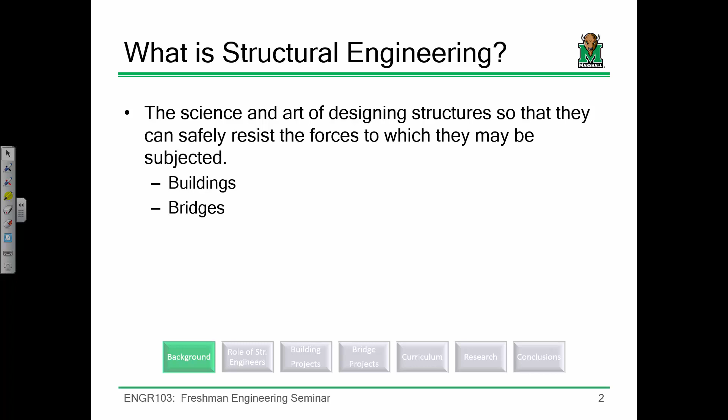We do our best to simplify things by looking at it from two sides of the equation. So the first thing we do when attacking any type of structural analysis problem is we start looking at the loads that our structure is going to be subjected to.

Let's say we were designing some of the floor beams in the room you're sitting in right now. First, we'd have to quantify the loads those beams would be subjected to. The beams have to resist their own self-weight and the weight of all the floor components, and they have to be strong enough to resist the weight of all of you.

If we look at entire building systems, we have to consider environmental loads, making sure buildings can withstand things like wind and snow. Another big topic in structural engineering that doesn't really affect us here in West Virginia, but can affect places like California or Japan, is earthquakes. Buildings have to be strong enough to resist that.

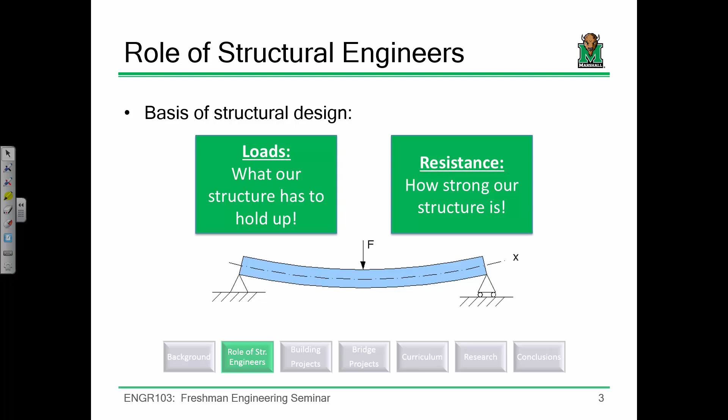So that's the first side of the equation: calculating all the forces structures will be subjected to. The second half is resistance. In college, getting your bachelor's or master's degree, you'll learn how steel, concrete, and timber behave. Once you determine how those materials and members behave, you ask yourself: how large do those members need to be so their strength is bigger than the loads? That's basically all there is to structural engineering, but it presents an interesting dilemma.

Say you're a bridge engineer designing a bridge in your hometown, and you know your grandma and grandpa will use that bridge every day to go into town or to the grocery store. You think, I don't want anything to happen to grandma, so I'm going to design it very stout, using very large, deep beams to make a very strong structure.

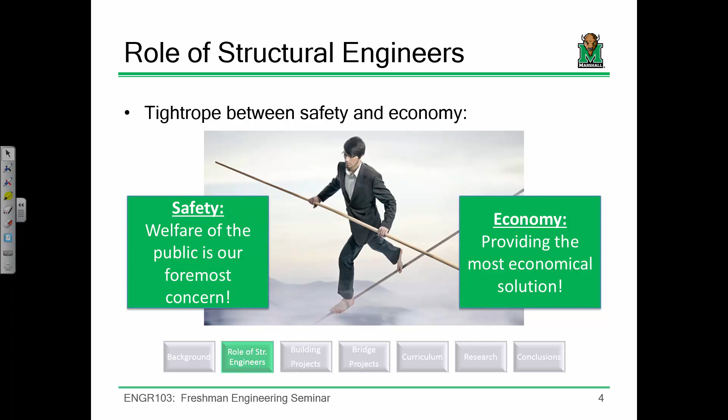That creates a problem, because while you've designed a structure that's safe and sound, you've also made one that's very expensive. This is true of structural engineers, and really most engineering disciplines in general: we walk a tightrope between safety and economy. We always have to design a structure that meets the safety and welfare of the public first, but once we meet that, we have to design something economical. That's where the challenge of structural engineering comes into play.

We don't just work on tall buildings—we also work on things like stadiums, such as the new Dallas Cowboys Stadium. Looking at projects like this, you might wonder how you even begin to approach something so massively complex. But our general strategy is this: even though a structure has thousands of different members and components, it's still just comprised of beams, columns, braces, and things like that. If you can design a beam or a column, you can design any beam or column in a structure like that.

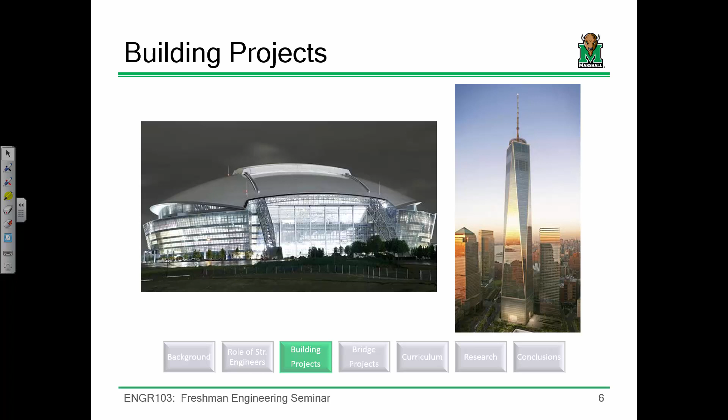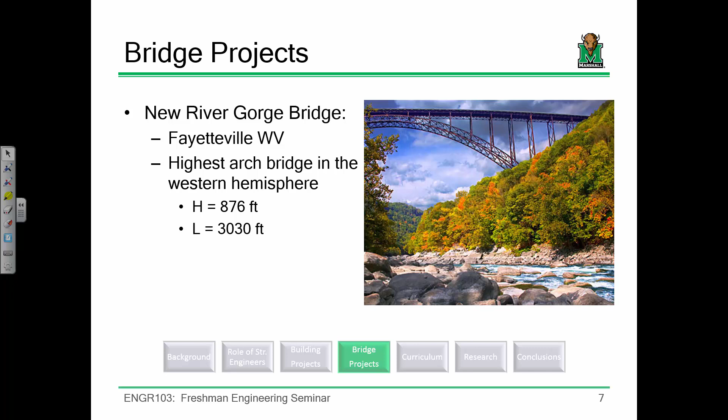Just a little bit of info about later. Like I said, I'll be teaching most of the structural engineering courses, and this is the kind of stuff I'll be teaching. Now, the first four courses, if you're getting a BSc with a civil emphasis, these are courses you're going to take anyway.

These would primarily pertain to things like structural engineering or geotech. If you're interested in structures, you might want to consider taking steel design. Also, I'm not 100% about this, but hopefully by the time you're juniors and seniors, I'd like to offer a course in advanced structural analysis, so you might want to consider that as well.

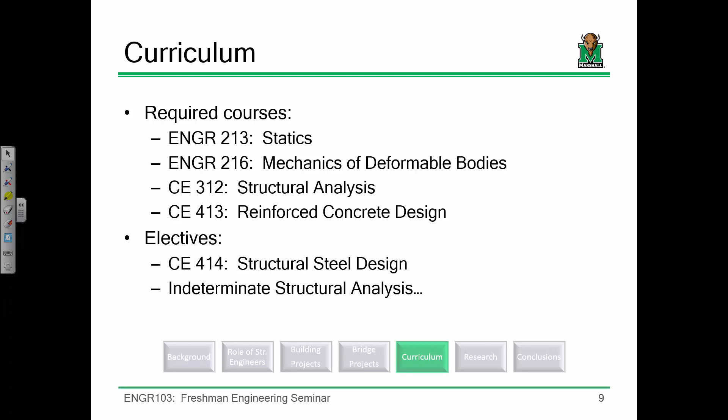A little bit about what it is that I do. My research area is specifically focused around steel bridges, and the long and short of it is what I try to do is make steel bridge design simpler and more economical.

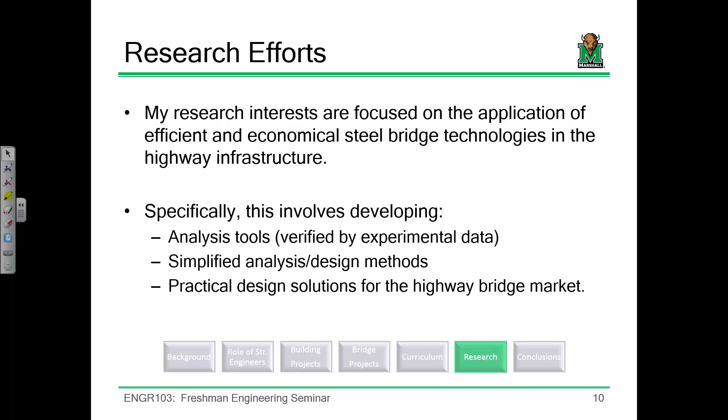I wanted to share one of the research projects I've got going on, because later on, if you're interested, I might ask for some of your help doing testing for this project. This is a project I've been working on for a couple years now, and I've brought my work with me here to Marshall University. You've probably seen the new building being constructed, and there's a new structural testing lab going in the back of it that I'll definitely be using to evaluate this system.

A little bit of background about this system. This was an idea generated from members in the short span bridge industry to try and tackle the needs of our infrastructure. When we look at things like bridges, our infrastructure really isn't doing so hot, so we're really trying to come up with new and innovative ways to tackle that problem.

This is a concept we came up with that utilizes standard plates to fabricate a tub girder, which you see right here. The idea of a standard plate is kind of like the idea of lumber - if you go to Lowe's and ask for a 2x7, they'll laugh at you because there's no such thing. They come in standard sizes like 2x4, 2x6, 2x8. We used a standard plate the same way, to fabricate a tub girder, and then just ship the whole thing to the site.

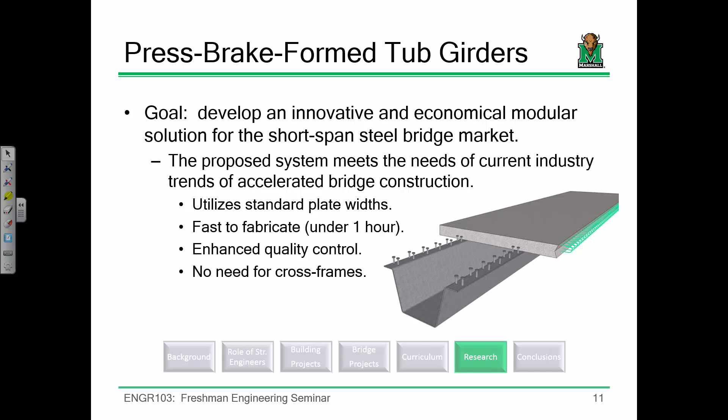These things are incredibly fast to fabricate. It usually takes a conventional bridge girder about a day to fabricate; it takes these under an hour. I watched one fabricated from start to finish - it took about 35 minutes, so it's incredibly fast. But it's new, unique technology that nobody really understands how it works, and nobody really understands how strong it is. So how do you determine how strong it is?

You test it. For my PhD, I engaged in a large-scale experimental testing program looking at assessing how strong this system is. To give you an idea of the scale, this is us casting a concrete deck on one of the specimens, and that's me casting the deck. This was the specimen when we were done testing it.

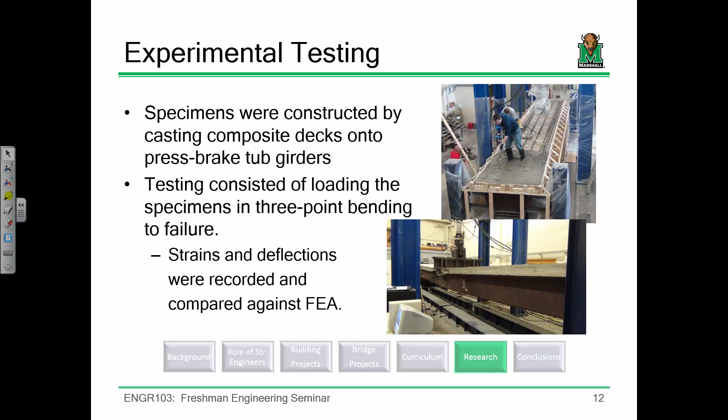I'll walk you through what we did, because this was some really exciting work. This is a slideshow showing the progression of a test from start to finish. On the top left, you see the standard plate being formed using a large capacity press brake - here they're forming one of the top flanges. After this, they'd flip the girder upside down and make two bends to form the rest of the tub.

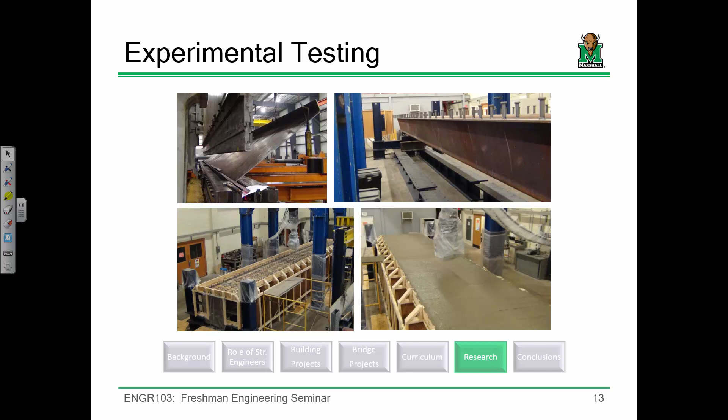We shipped the tub to a structural testing lab and erected formwork to cast a concrete deck. You saw me up there casting the deck, and this is what it looked like when done. We waited for the concrete deck to cure, then installed a series of instruments to measure its response. Up here on the top right is what's called a load cell.

A load cell is really nothing more than a super duper fancy hyper accurate bathroom scale. As load's being put on it, it measures how much force is on the ends of the beam. We've got a series of strain gauges on the girder, which essentially measures how much stress is in the beam at a given point. In the middle of the beam, we had an actuator applying load - an actuator is really just a really accurate piston.

That's a good question. What I'll say is this: you really don't measure stress. Stress is internal, it's just an internal distribution of force.

But what you do is measure strain. You measure how much it stretches, how much it deforms. I'll go ahead and talk about that real quick. Here on this girder you see a series of strain gauges.

Strain gauges are really just calibrated pieces of foil with coiled up wire on them. The idea is you pass a current through it, say 10 millivolts. As the girder is being loaded, the wire stretches, the voltage changes, and you take that change of voltage and back-calculate how much the girder is stretching.

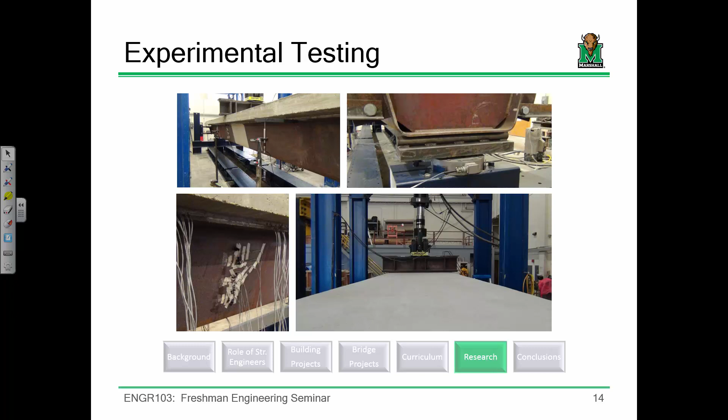So right here in the center, this is what's known as a large capacity actuator. It's basically a hydraulic piston. You feed hydraulic oil into the piston, and it applies load. And we just kept doing that until the girder failed.

This was the girder at about 150,000 pounds. This was it at about 250,000 pounds. At about 300,000 pounds, we started to see a little bit of cracking. This was really when the girder started to fail, but after it failed, it really wasn't resisting any more load.

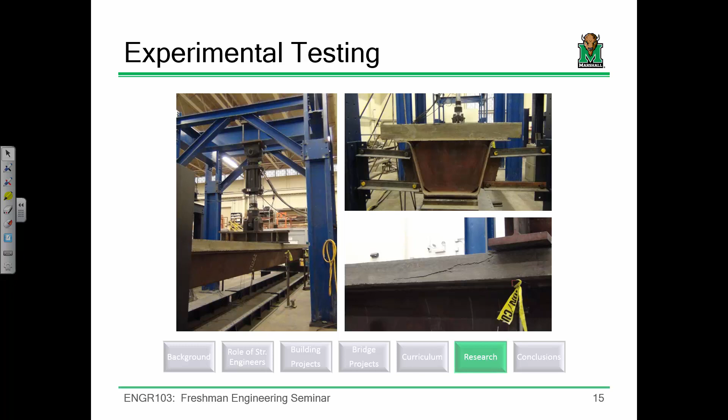We decided to have fun with it, and we loaded it so much that we completely destroyed it. You could actually see completely through the deck on one end.

To give you an idea of how strong the girder is, when we design highway bridges, we design for a vehicle that weighs about 72,000 pounds. This one girder resisted over 300,000 pounds. So these girders are very stout and very strong, and they're very cheap to build as well.

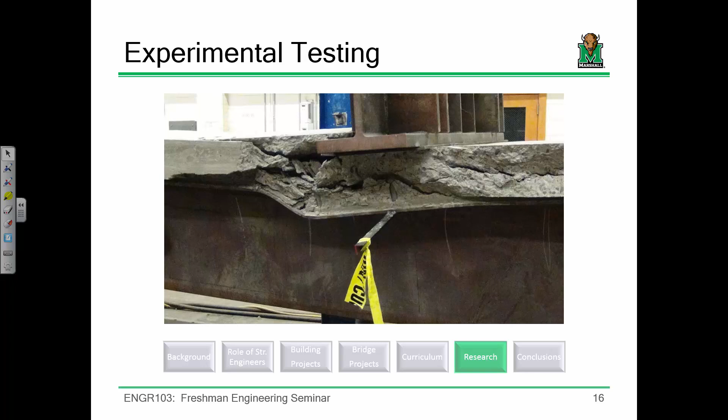But there's a whole other assortment of issues that need to be investigated, which we're going to be doing in the new structures lab in the new building. So just a thought to keep in the back of your head if you're interested in fabricating some large-scale specimens and loading them to failure, keep that in mind.

My general thought is that any day with controlled demolition is a good day, but that's me.

So just to conclude real quick, structural engineers, what is it that we do? We design safe and economical structures. You're going to enjoy a decent salary. You're going to enjoy job flexibility if you're a structural engineer. One of the nice things, if this is something you're interested in, you are somewhat afforded the opportunity to travel if you would like. No two projects are the same, which is an added bonus if you enjoy a challenge.

And I say this about structural engineers, but this is really true about engineers in general. You're really going to be hard-pressed to find a career that contributes more to society. And if you don't believe me, just look out the window. What do you see? You see roads, bridges, water systems, dams, buildings, everything that comprises the built infrastructure. That wouldn't happen if it weren't for civil engineers.

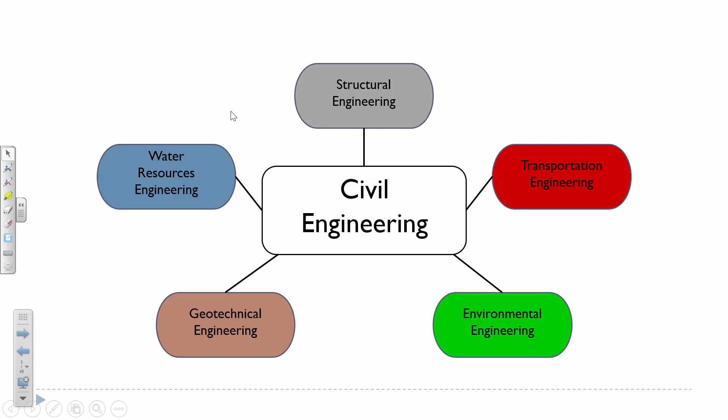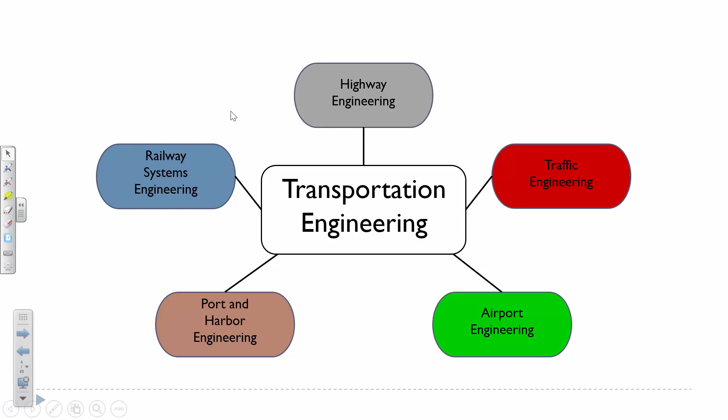As we've been talking about civil engineering, you have multiple disciplines: structural, water resources which is hydraulics, geotech, and environmental as well. You can do this with every discipline of civil engineering, breaking it down smaller and smaller. So transportation engineering even - you can get it down to highway, traffic, airport, port and harbor, railway. My focus is traffic engineering, and even that you can continue to break down. What I mainly focus on is intelligent transportation systems and traffic signal design and management.

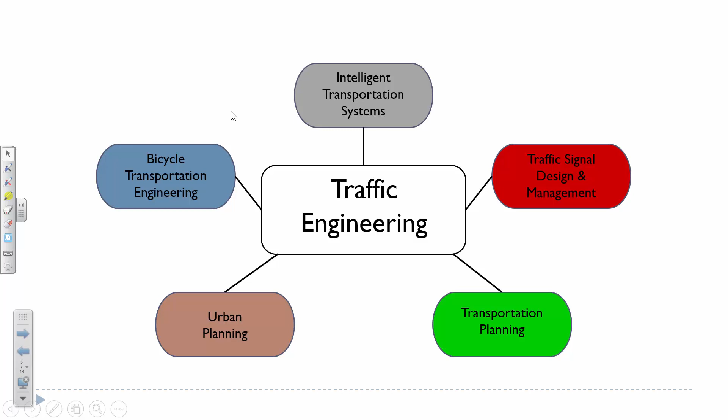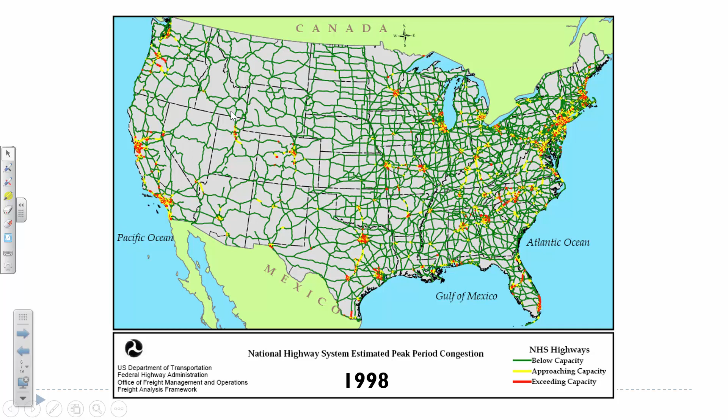With any form of engineering, you always start with a problem. In the early 90s, the U.S. Department of Transportation and the FHWA, Federal Highway Administration, looked around and said we're going to run into some issues pretty soon. This was their forecast for traffic in 1998, showing all the highways throughout the United States. Green is operating below capacity, and red is exceeding capacity. Everything looked all right, not in bad shape. But then they looked at 2020, and saw a lot of red. They said we're going to run into some big issues, and that's where they said we're going to need a solution.

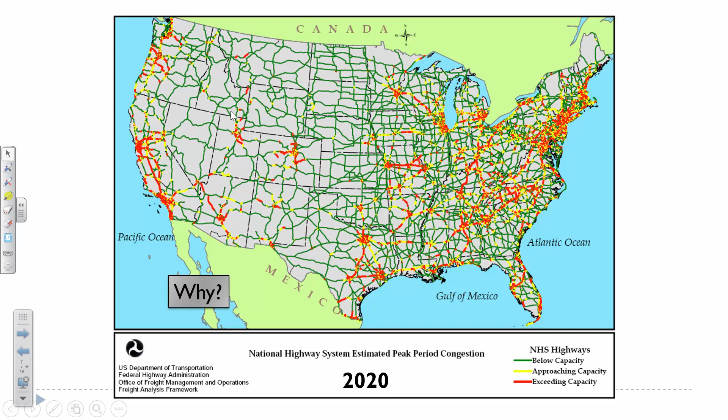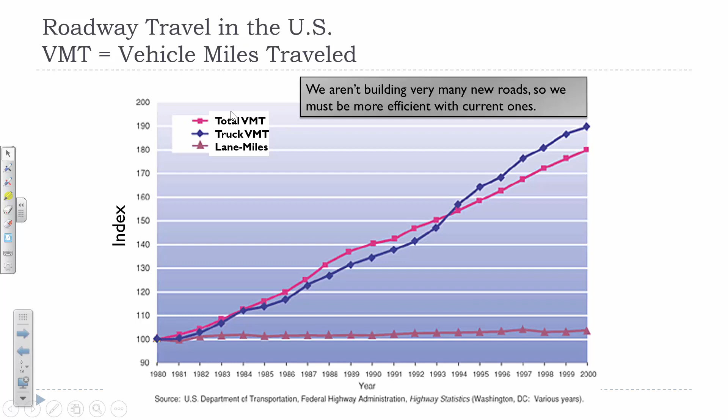Intelligent Transportation Systems - I'll just refer to it as ITS from here on out since it's easier. It's the use of communications-based information and electronic technologies to improve safety, mobility, enhance productivity, and increase security. It's made up of a number of systems that focus on intelligent vehicles, intelligent infrastructure, and the integration of those two working together.

Any government agency, when they see a problem, what do they do? They throw money at it. In 1991, they said we see this problem, we need to do research on it. What are we going to do? We'll throw some money at it. Over 6 years, they funded $1.2 billion worth of projects to try and come up with solutions - throwing it out to people, state agencies, and private agencies to say what can we do to fix this, we're going to be in trouble, how can you help us out. That funded a lot of projects, and then in 1998 they said we're still not quite there, we'll keep throwing money at it. The money thrown into that research has decreased somewhat, but there's still plenty of federal funding that goes into ITS.

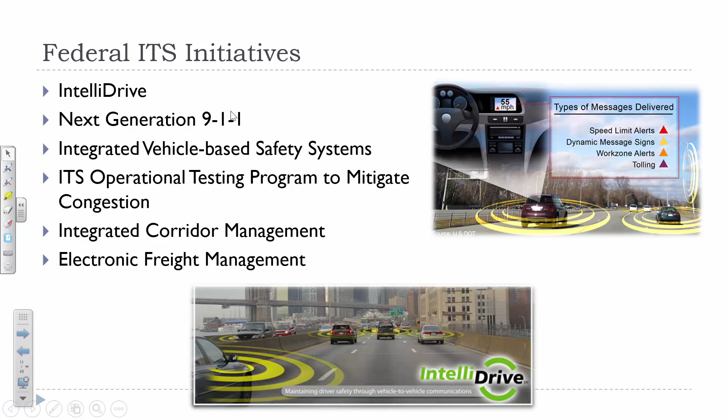Operational testing to mitigate congestion, which again ties back to that original problem. Corridor management, electronic freight management, and a few more here. AERIS is a big one that you'll hear about a lot now.

Basically, that's got an environmental component to it. It's being driven by more cars on the roadway. How can we have less emissions? It basically just means you have to move traffic more efficiently, and that's how you're going to reduce emissions.

Intersection collision avoidance, national 511 deployment, that was a big one. We'll talk about that here in a minute.

So some more ongoing major activities: real-time data capture. That was a huge push in ITS as well, how can we get more data? And now we've gotten to a point where we have a ton of data, but it's almost to a point where we don't know what to do with it. We have so much, and that's where a lot of the research is being focused now: okay, we got all this data coming in, what can we actually do with it?

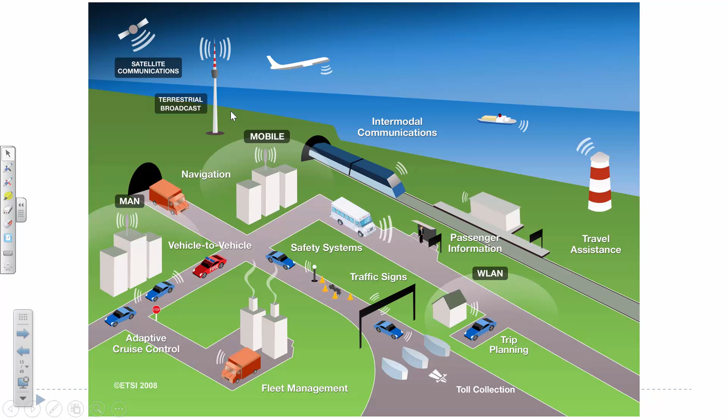And then vehicle to infrastructure safety. So we've got vehicle to vehicle communication, but now we also want to do vehicle to infrastructure communication. It's all about integrating everything. You can kind of see this in this picture. This is like an ideal ITS scenario. You have every vehicle talking to every piece of infrastructure, all integrated into a centralized system.

Arkansas, it's really funny to me. They're like, no, we're not going to do that. This is a federal initiative, but we're just not doing it at all. So it's something that West Virginia was not last in. We were second to last. So we're moving on up.

We're doing our best. So like I said, ITS within West Virginia, we were a little bit behind the times. If you remember, the federal initiative started in 1991. By the time West Virginia got around to starting their ITS program, it was 2006, so 15 years behind already. We're trying to play catch up. But starting in 2007, that's when the deployment actually began of all this stuff.

So what we had: statewide traffic management center. We'll kind of examine all these individually quickly. RWIS, which is roadway weather information systems, dynamic message signs, closed circuit TV, integration with county 911 centers, and the West Virginia 511 system. So basically, for West Virginia, they were coming at this all from a safety perspective. That was their driving force in implementing ITS, and you'll kind of see that throughout.

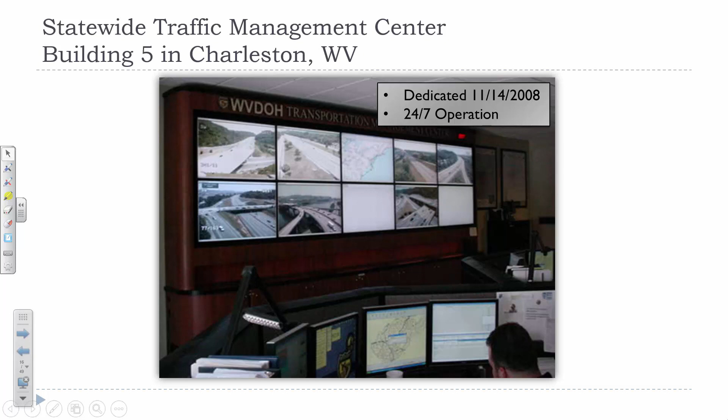And they'll have kind of these displays, and I'll breeze through what those look like. But they have all kinds of information available to them: 911 information, accident information, this will come from weather information. It'll come from all over. I'll show you how that kind of all comes together and what the end result is.

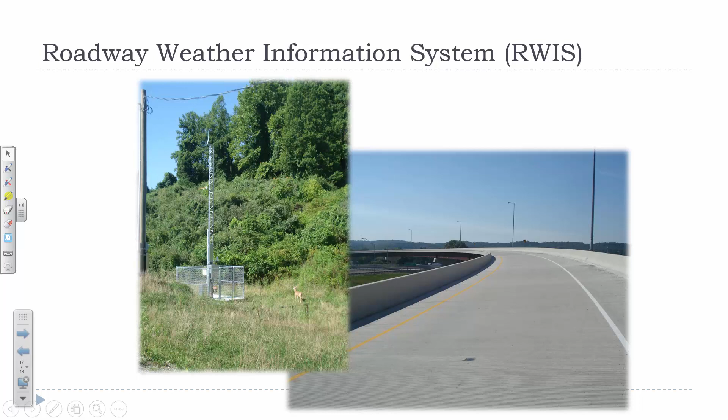So one piece of information is RWIS, and this is weather information that they can get two different ways. There's stations located along the road, on the side of the roadways, and then actually in the roadways. It's kind of hard to see, but there's a little puck, about a 3-inch diameter, down into the pavement, and that'll give them internal information about what's going on there. So these are the locations.

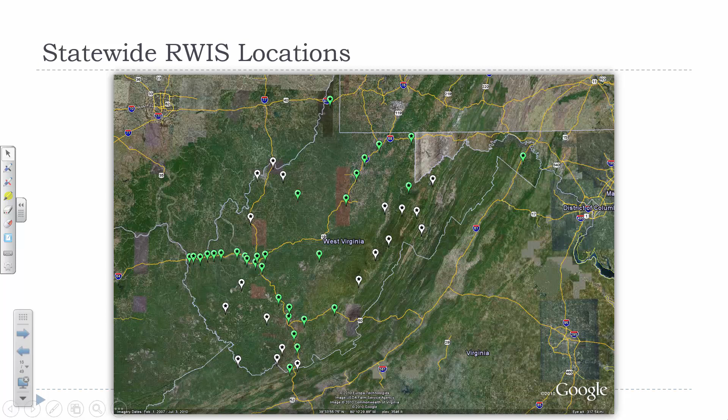As you'll see, West Virginia has been very critical to put them along interstates, not so much along state routes or county routes. There's a few throughout here, but really the focus of West Virginia has been on interstate routes, and you'll see that throughout everything they've done.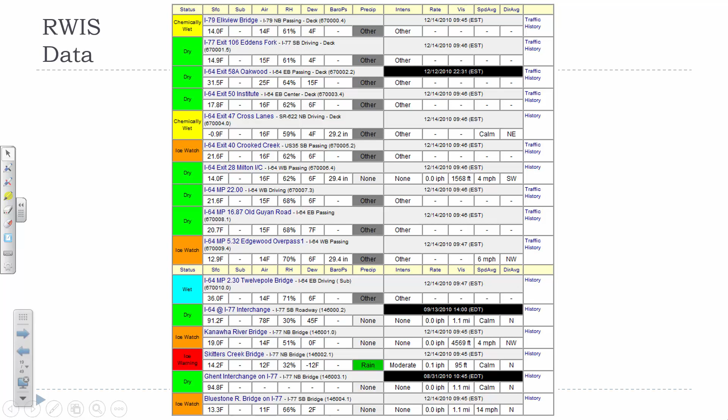This is a lot of information, but this is what you get out of every one of those sensors. You can get external temperature, internal temperature, dew point, precipitation, whether there's any rain or snow going on, and some of them have wind information coming in as well. So a lot of different capabilities, and they're located throughout the state.

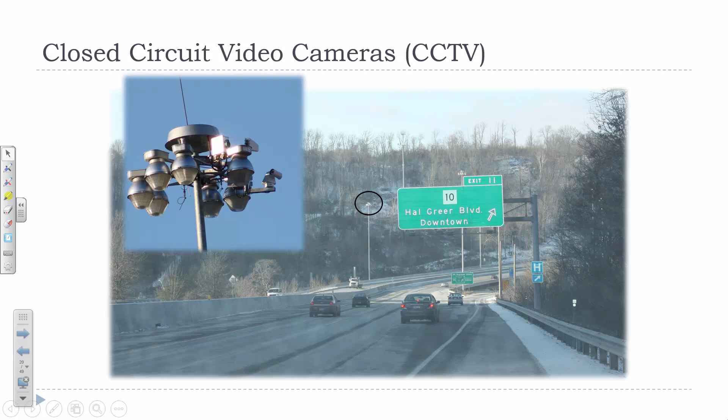All that's coming back to the Traffic Management Center. Closed circuit video cameras, they've got those as well. This is a familiar exit, Hal Greer here. You would never know it, but there's a camera located right here. This is kind of the view coming back.

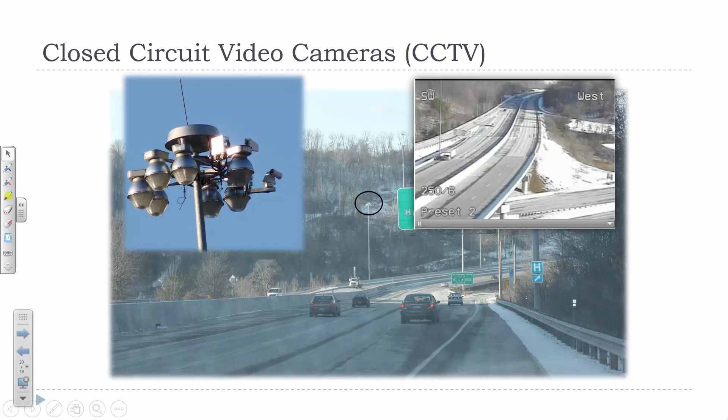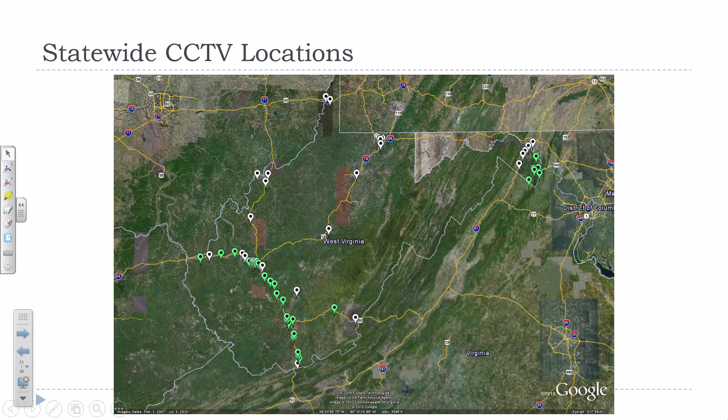All these cameras are coming back to the TMC, and they're located throughout the state. They have full zoom capability on those cameras, they can zoom in and look at your license plate. Not that they're doing it for any particular reason, but more so when an incident occurs, they'll zoom in on that location, see what's going on, so they can get information out to the public. Those are located heavily along the interstate corridors, and they're starting to integrate them into major U.S. routes. You'll see a couple on 19 here, but it's mainly on the interstate.

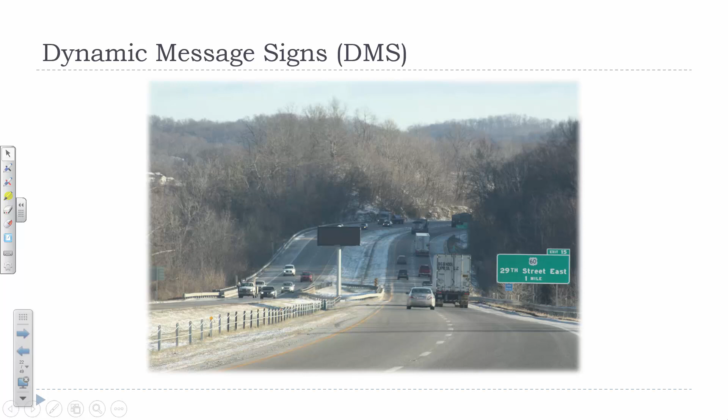Dynamic message signs. This one is blank right now, but that's where you've all driven down the roadway and sometimes it's helpful information and sometimes it's not. They're trying to do a better job about that. Sometimes it's old information. You'll see a wreck at mile marker 28 and you drive by mile marker 28 and there's nothing going on. So that's part of this initiative as well, trying to clean that up and do a better job getting relevant information out to the public. Again, these are along state corridors, mainly the interstates.

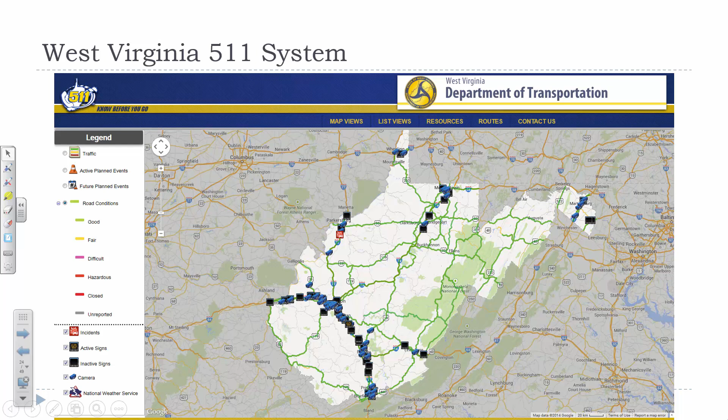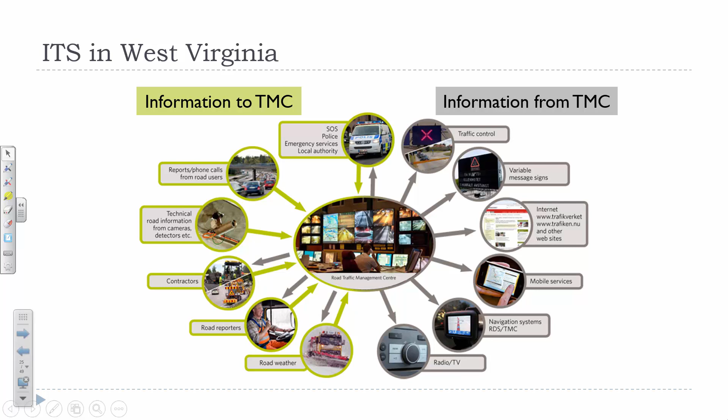This is kind of the flow of information: you've got information coming in and information going out. This picture isn't from West Virginia and some of the words aren't accurate, so don't grade me on that. But you've got police information coming in, phone calls coming in, cameras, contractors, road reporters, and weather coming in, and then all that's broadcast out - to the 511 website, the 511 phone system, dynamic message signs, and any traffic control that's necessary. So that's ITS, all being tied together.

Some of the challenges throughout West Virginia that we've had are the communications infrastructure and the geography.

Just being a mountainous region, it's harder to get communications from point to point. Funding is always going to be an issue. Again, everything in West Virginia has been kind of safety driven, so if they don't see it as a safety concern, they're less likely to give money to that.

Even if it is shown to improve the overall traffic flow or driver experience, the future of ITS in West Virginia includes adding additional field devices, integration of additional 911 centers back to the traffic management center, and just continuing to evolve with technology, not being 15 years behind like we were at the beginning.

So ITS at RTI, I'll talk about this for a minute. The Rahall Transportation Institute is a university transportation center, meaning a lot of our funding is federal funding, and everything else is project-based. So everything we do is research-based. We do a lot of projects specifically with the West Virginia Department of Highways, working alongside them on a lot of these ITS deployments, and that's kind of what you'll see here.

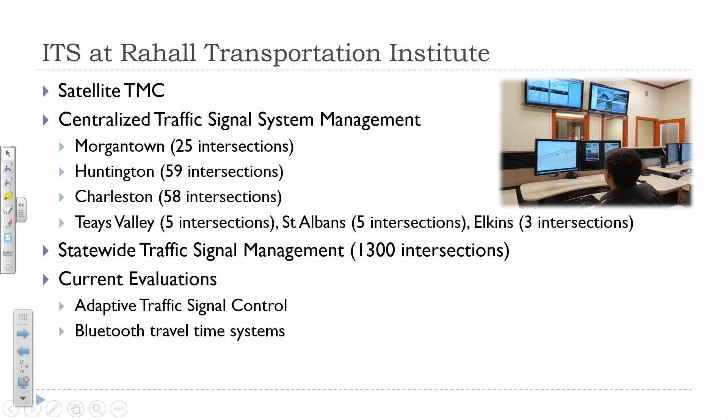But we've been managing some of these other systems before then. Morgantown has been about 5 years now, and Huntington, which I'll focus on since it's most relevant to you guys who actually live in Huntington, you'll be able to see some of that.

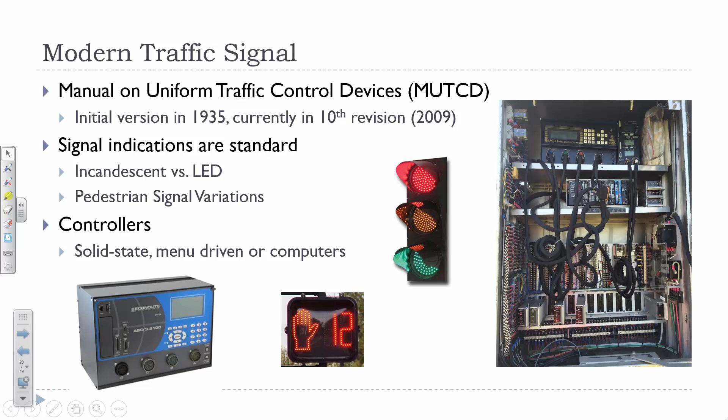I'm not going to get into details, but you've got what we call a conflict monitor, and then you've got load switches down here. Basically there's a lot of wiring, everything coming in—every signal head has a red, yellow, green wire, and those all have to come in there. So just a lot of wiring coming in as well. Those are some of your components. You've got more components too—you've got detection.

I'm sure you've noticed along some of the intersections in Huntington, we've got video cameras. I've had a lot of people ask me, are those red light cameras? No, they're not—they're just detection cameras, meaning they're sensing whether there's a vehicle there or not. When there's a vehicle there, that camera will send a signal to the traffic signal controller and say, hey, there's a vehicle here, we need to turn that phase green. So that's all that's doing.

It's not taking pictures of you, it's not seeing if you run red lights. That's not to encourage you to run red lights, but just know if you accidentally do, you're not going to get a ticket for it. And also for future reference, if a city is using red light cameras, they have to have signs up.

So that's an easy way to get out of a ticket. If there's ever not a sign and they're using red light cameras and you get one, just know that.

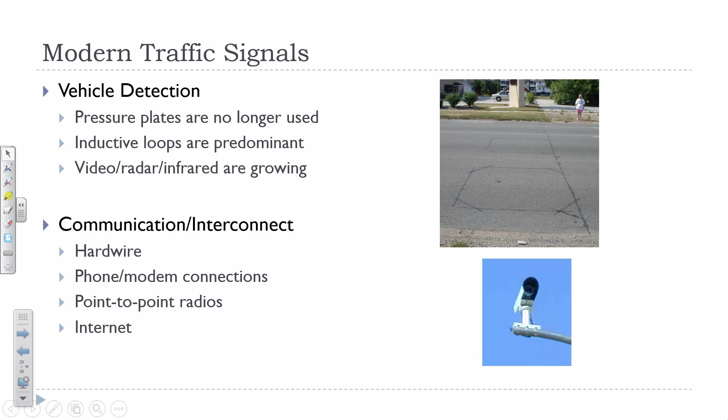You're good. Inductive loops - I'll talk about those in a minute, but basically as you approach an intersection, sometimes you'll see they saw cut out. It's the most common type of detection. It measures inductance, so it's basically like a magnet. When a car's over it, it sends a signal to the controller. So that's all that is.

The problem with loops is because they are cut into the pavement, they're susceptible to issues if that road is repaved - then you have to put the loops back in. And a lot of times you'll get weather issues with them, like if water gets in there. It's supposed to be sealed, but a lot of times that sealant doesn't take for multiple years. But that's an inductive loop, if that answers your question.

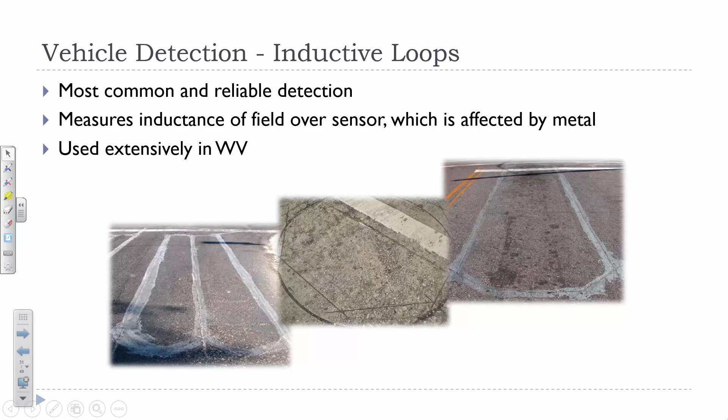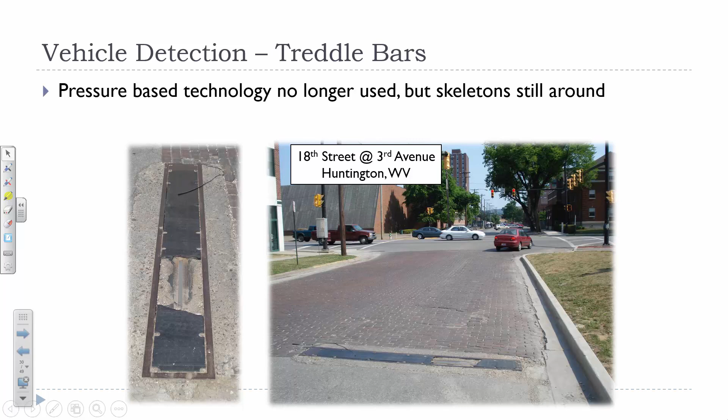So older types of detection - this is just a fun fact, but this is 18th Street. You'll see these old pressure plates. That was one of the early forms of detection - it would just depress as a car went over it. These have been here for at least 20 years. It's amazing to me that they've never been removed, but you can still kind of see them. Now they're basically just a hassle to drive over for you. But now you can tell your friends what they actually are, that there used to be a purpose for them, and they're not just random rubber plates in the roadway.

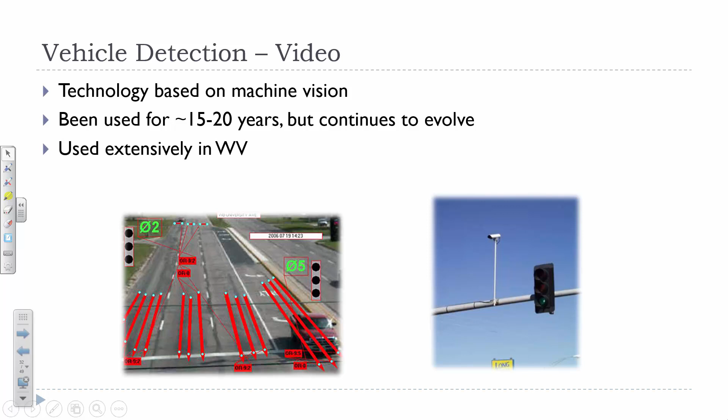So some of the problems with video detection - if these zones aren't set up right, a lot of times you'll have a car sitting here, but it's not on the zone on the camera, so you can sit there and no call will ever be placed. And again, it's susceptible to weather, like if you have fog, generally the camera can't see through that, and so that creates some issues. Basically, there is no perfect detection system.

This is a newer one that we used in Morgantown - magnetometers. They're using the same technology that a loop would, but on a much smaller basis. They're about the size of a hockey puck, if you can envision that, and they're just drilled down into the roadway. And again, they detect that vehicle when it's sitting over it.

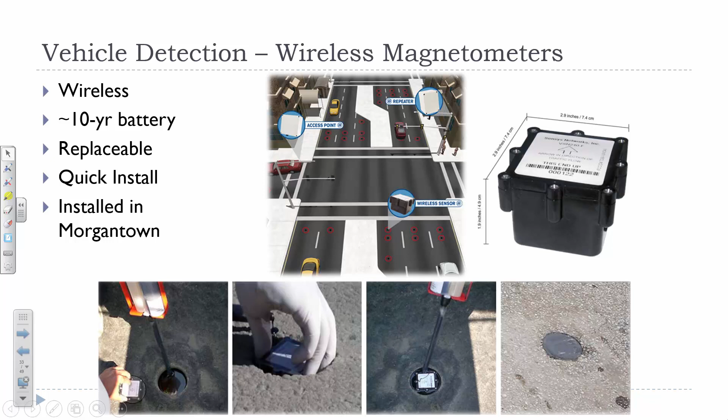And the last and newest form of detection is infrared detection. Those will use the heat signature of a car to detect it. They're not being used very much in West Virginia - it's a newer technology, like I said, and we're kind of always behind the curve on that. But there's a couple systems that the DOH is using those on.

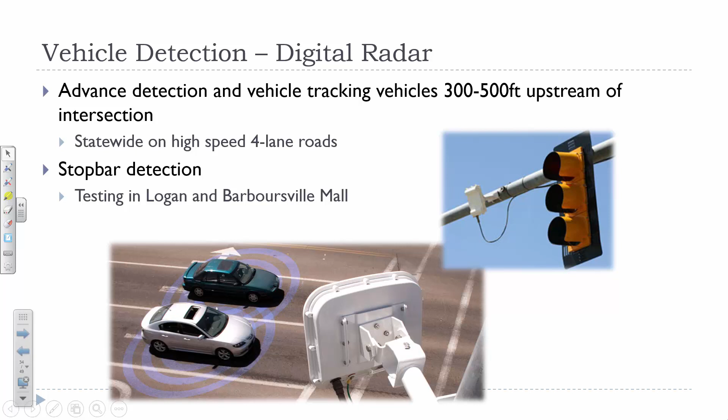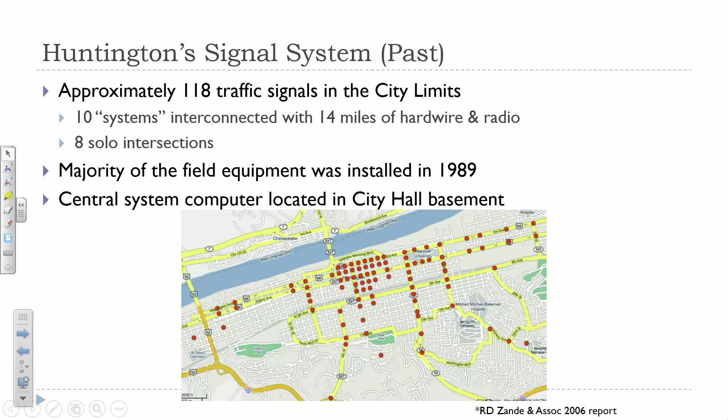But the old Huntington system, there were a lot of issues with it. It was installed in 1989, and so in 2011, they came along and said okay, we're going to redo this. To see how bad it was, we did some travel time studies. We've got a GPS data collector - you stick it in your car, and as you drive down the roadway, it collects your time and your position. So these are the red and the blue routes that we collected.

So how bad was it? This is an ideal travel time, 300 seconds, going on 3rd Avenue from 31st Street all the way down to 1st Street. So that's what it should be if you drive the speed limit the whole time. But we were getting stopped at Hal Greer a lot, stopped at 13th a lot, and basically it ended up being 2 to 4 minutes of delay each time down through there. Now that doesn't sound like a lot, but if you are running late and you need to be there, 2 to 4 minutes turns into a long time.

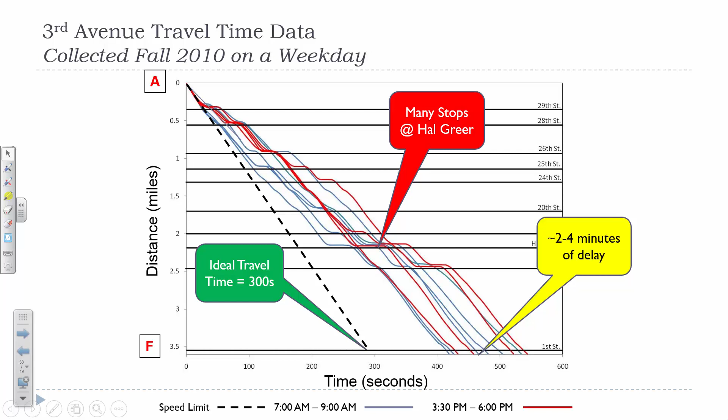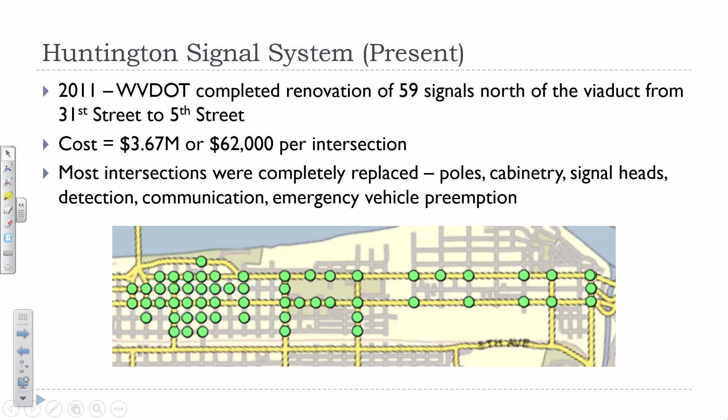But also if you add up the cumulative time, if you drive that same route every single day, you're going to get pretty tired of being 2 to 4 minutes longer than what it should be. So again, in 2011, they came along. It was a $3.67 million project. They said we're going to redo these 59 intersections in Huntington. They completely stripped most of them to the ground, poles, cabinetry, signal heads, detection, everything. So basically starting from scratch.

And so now we're moving into the new age with what they did. We've got a centralized management software. And so basically what that means, and I'll show you how this kind of all comes together here in a minute, but I can sit at my desk. This display is real time.

There's communications back to the intersection, so I can see what's going on at every intersection in Huntington, and I can also upload and download from the controller, which means I can send changes out if I ever want, like for a football game, for example. That's a special event, so I can change the timings for 2 hours and send that out to the controller just sitting at my desk, rather than having to go out to the field, which is what you would normally have to do, and do it intersection by intersection.

So that's really helpful. In Huntington, it wouldn't be as big of a deal, but for a system like Morgantown that we're managing that's 3 hours away, it's really nice that I can just sit at my desk rather than driving 3 hours there and 3 hours back just to make what could end up being a 5-minute trip to the field.

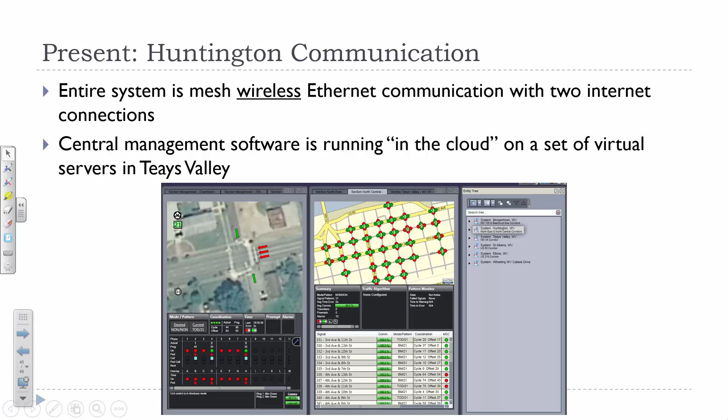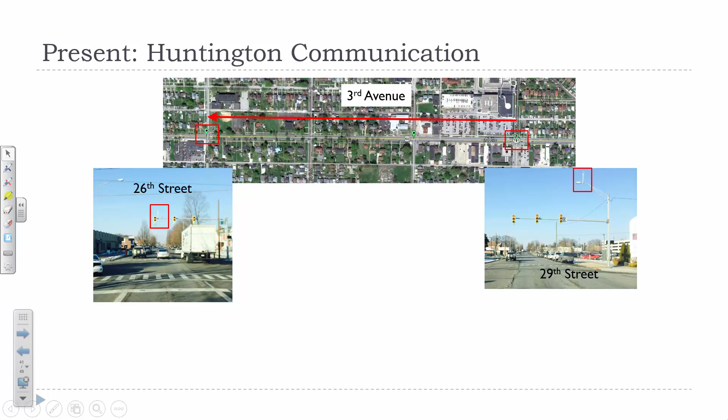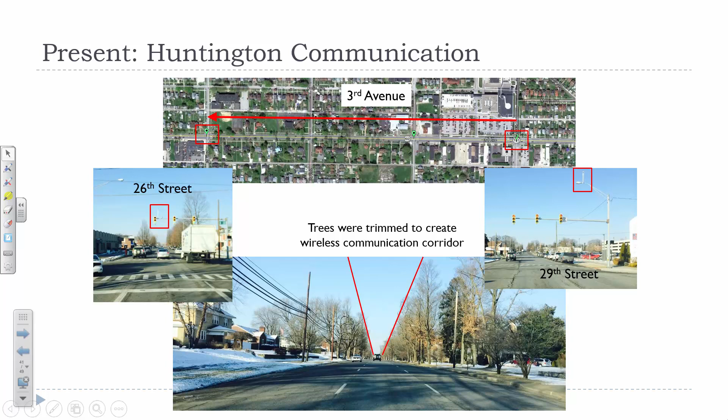So the communications, what that looks like in Huntington, there's a radio at each intersection as well. You may or may not have seen those, but each intersection's talking to each other. So this is 26th Street on 3rd Avenue and 29th Street on 3rd Avenue. So those radios are constantly in communication, and then that'll come back to a master intersection. So there's a lot of information here, and I'll try and make the most sense of it.

And then that information is going out over the internet. It's going to a data center in Teays Valley, sitting on a virtual server, and then I can access that server, or anyone else can that has the proper credentials, obviously, can access all of that information from anywhere. All it is, is a remote desktop connection over a VPN. So it's a pretty simple setup, but again, there's two-way traffic, so I can talk to each individual intersection, and that intersection can talk to me as well. So it's pretty incredible what we're able to do with that, the changes we're able to make just sitting at our desk.

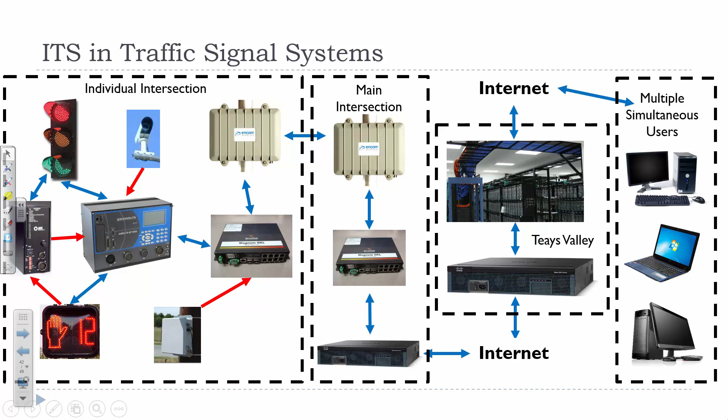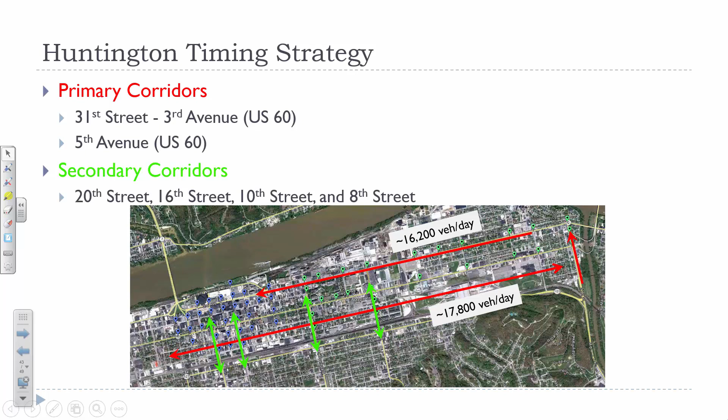The user benefits, we kind of put a number value to time and said time is worth this much, each minute saved is worth this much. So it's an approximate savings of $1.7 million per year. That's cumulative for every user. So that takes into account fuel cost and, like I said, just your time.

I'll stop here just because that's kind of the end of our time and the end of what I have for Huntington. But does anyone have any quick questions for me before Dr. Waite lets you guys get out of here?